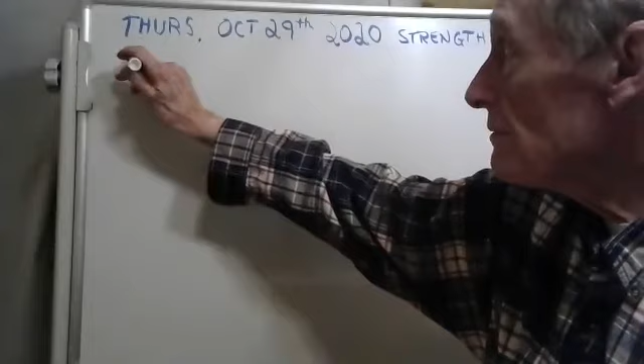The topic - we're going to study plastic behavior now. Can you go over problem F6-11? You want to look at that? Yeah, we can look at that. Mohammed wants me to look at problem F6-11. Let me find it, hang on. You don't know what page it's on. Never mind, I found it, it's page 302.

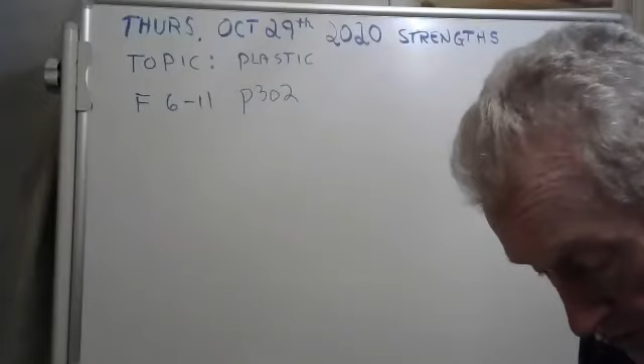First thing we have to do is get the moment of inertia. See, we're going to use this equation here. But we need this I thing here, they call that the area moment of inertia. We need that. Now let's see if we can get that. Let me draw this, it's 200 by 20. Okay, here we go. 200 by 20. Everything's 20.

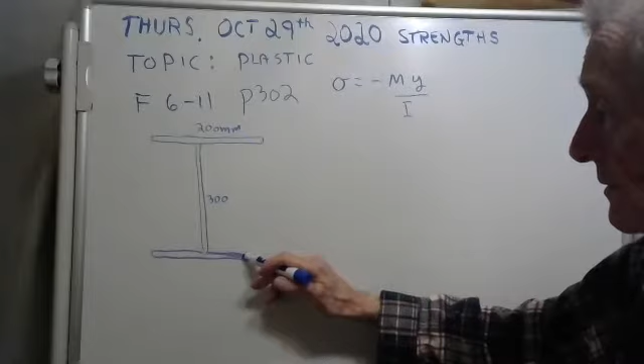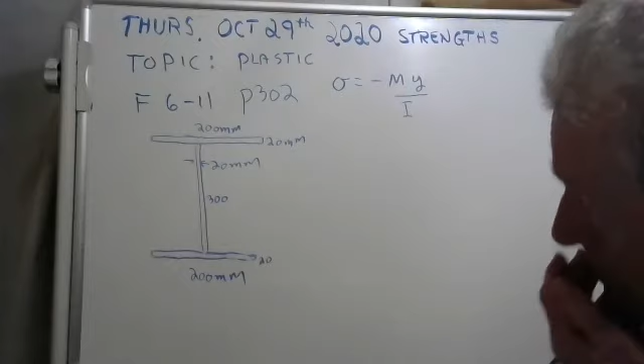But now, wait a minute, that's longer, that's 300. That goes down to here. Yeah, that's 300. This is 200. And then this one is the 200 again. Now that's 200. And these little pieces here are 20. These are 20. And this here is 20. And now be careful now, though - this 300 goes all the way to the very bottom and all the way to the very top. You know that, according to the picture there.

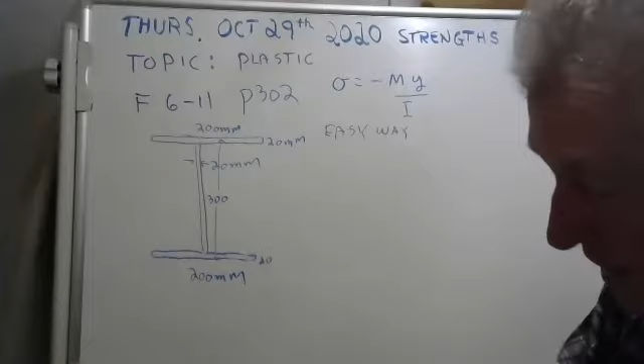Okay, now there's a hard way and an easy way to do this. Let's do it both ways. Now the easy way is you take this whole thing here. Yeah, there we go. See that whole thing? The moment of inertia, that whole thing is 1/12 times 0.2 times, in this case, it would be 0.34

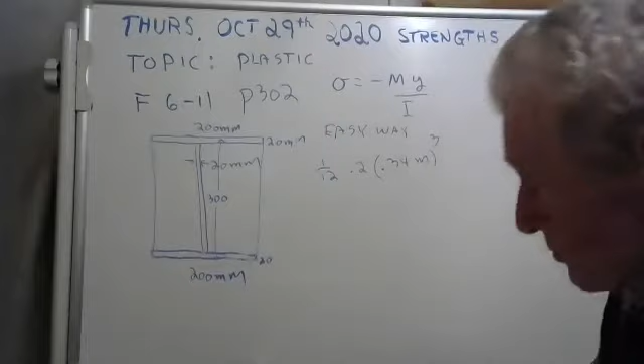cubed, isn't it? Look at the flap of your book - doesn't it say 1/3 or 1/12 BH cubed? 1/12 base - well, that would be the base, and see the height, it would be 0.34. Because it's, no, I got that wrong, it's just 0.3. Just about goofed up there.

You see this whole height is 0.3. Okay, and then what you do is you subtract these parts that aren't there. You see this rectangle here? We're going to subtract that. And then we'll subtract this one that's not there. Okay, let's do that. Minus 1/12.

Well, there's really two of them, but the total length on them is 180. And the height of those, now watch it, that's going to be 0.26, isn't it? See, if you take 300 and you subtract the 20 and the other 20, that makes 40. 40 from 300 is 260, isn't it?

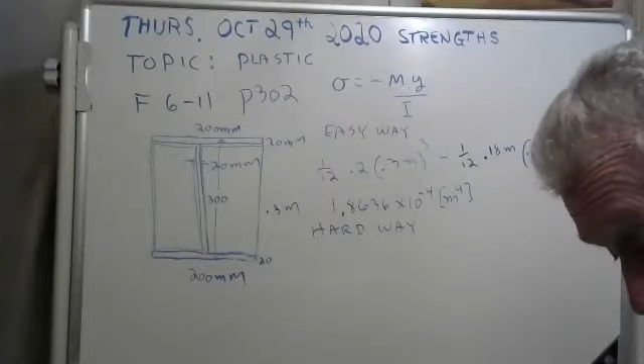Now let's do it the hard way. To do it the hard way, we're going to use the parallel axis theorem. And we're going to break this into three pieces. We have a horizontal, they call it a flange. And we have another horizontal flange. And then we have the web. So we'll just add the three up.

Now for this horizontal flange, they spell that F-L-A-N-G-E. What you got is 1/12 the base, which is 0.2, times the height, which is 0.02 cubed. But see, that would be the moment of inertia about the center of that flange. And to use the parallel axis theorem, we need this distance here.

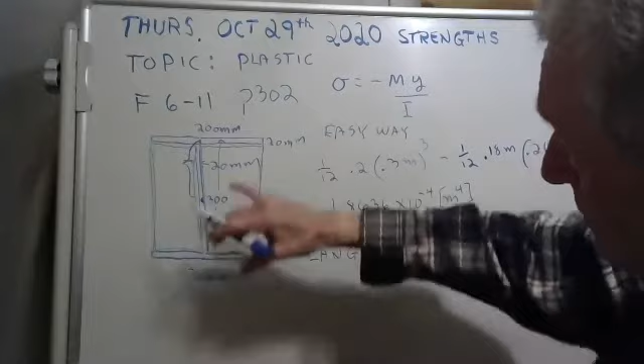So what you do is you take the area of the flange, which is 0.2 times 0.02, times that distance. Now let me think. That distance will be... well, it's 300 there, and it'd be 150. Then you need to subtract 10 from it. What's 150 minus? It's 140, isn't it?

And that's squared. Remember the parallel axis theorem goes like this. They call that the parallel axis theorem. And see, we got this here, right here. That's the moment of inertia about the center of that flange. And then you take the area of the flange, which is 0.2 times 0.02, right, times the distance between this G here. We call this G. You can call that point A if you wanted to.

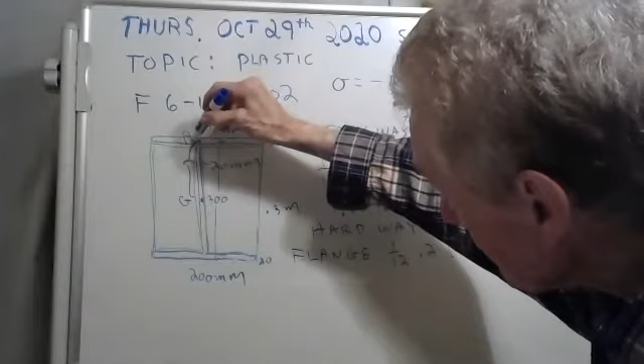That distance, I think, is 0.14 meters, isn't it? Did I do that right? Yeah, I think so. But the thing is, there's two flanges. So what you need to do is multiply that by 2, because there's 2 of them. There's one up here and there's a bottom flange.

But you're not done yet. You have to add the web. Now they call that the web. And the web is going to be 1/12, 0.02. Now watch it now. It's going to be that's the 0.26 meters cubed, isn't it? Let me think now.

1/12 the base. The base of the web is 0.02. And the height of the web is... that's supposed to say 0.26. It's 0.26 from here to here. Yeah, okay.

Okay, now here we go guys. We're going to take this here and we're going to add all that up. Then we're going to multiply it by 2. And then we're going to add this web to it. Let's see what we get. Here we go.

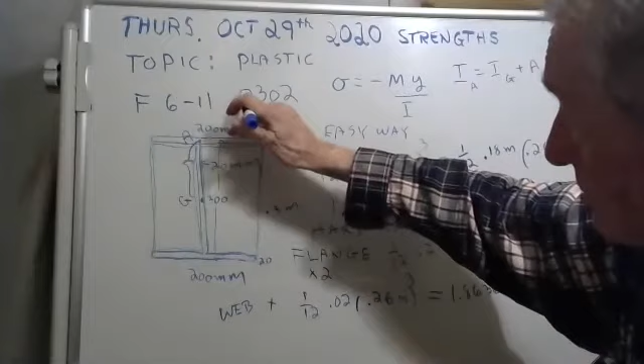Mohammed, which do you like better, the easy way or the hard way? Which do you like better? The easy way, I like it. Me too, I like it better. It's kind of nice. But you need to know, here's the thing: this hard way always works. The easy way, you got to be careful with it. It only works if you have a symmetrical thing like we got there. It's kind of got symmetry, doesn't it?

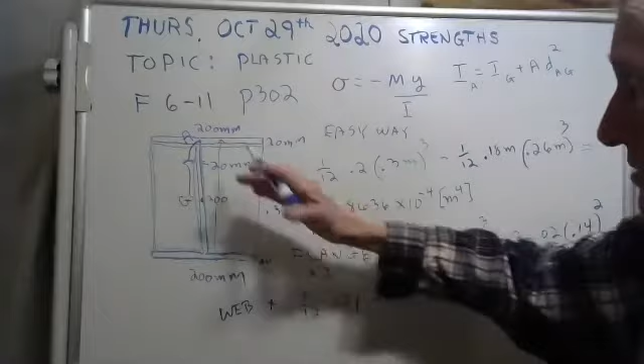It's got symmetry about the x-axis and about the y-axis. Be careful about doing it the easy way if you got an oddball looking thing, but it sure works nice if it's symmetrical.

Okay, Mohammed, are you happy with that? Yes sir, thank you. Oh wait a minute, we're not done yet. They wanted us to do something else, didn't they? Let me see here, just a minute. Oh, they wanted the maximum bending stress. So let's finish the problem for them.

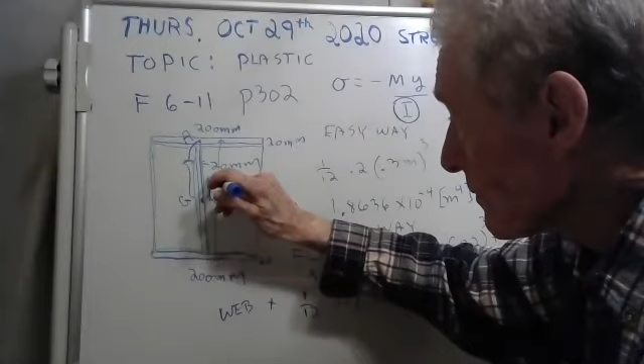All we've done so far is we've gotten this right here. They want this here, the maximum bending stress. Well, that's going to occur where this y is maximum. Remember what y is? It's the distance from the centroid, that's your y right there. And the maximum y is going to be either at the top or at the bottom. Now if you're at the top you get compression, and at the bottom you get tension. So they come out equal in this case, and that's what they want.

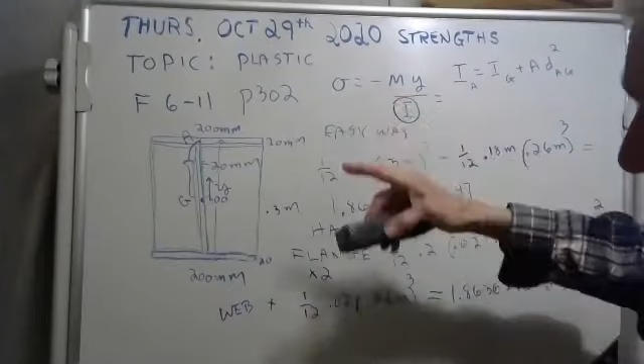Well let's do it, here goes. Never mind the minus, the minus is just to help you decide. See, if the y is plus, that's plus, that's plus. That minus there makes it a negative, that means you got compression at the top. So at the very top, if you want the maximum bending stress, you put a little b there if that makes you happy. Maximum bending stress will be, never mind the minus, I'm just getting the amount.

It's going to be, they gave you the M, 50 kilonewton meters. Now the Y, they're going from the center of the whole thing, the centroid of the whole thing, to the very, very top, is 150. So it's 0.15.

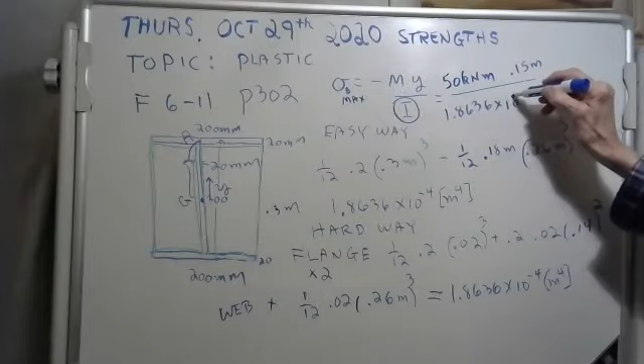And we have the moment of inertia. We did it two different ways: we did it the easy way, and we did it the hard way. We got the same answer both times, so we know we're right. Okay, I'm going to shut up for one minute, and I want you to plug that in, and we're going to get the maximum bending stress. On your mark, get set, go.

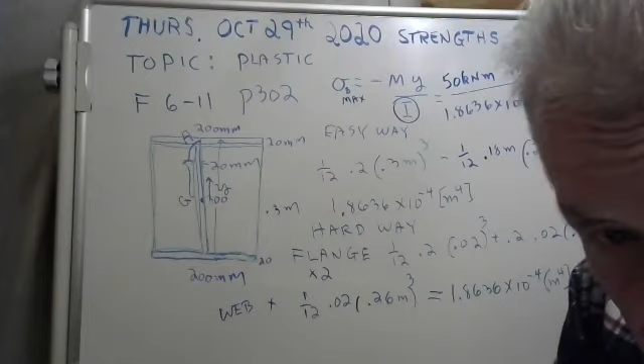Well, I got an answer. Let me go to one of my excellent students here. Shane, unmute and say hello, please. Earth's calling Shane, come in Shane. Earth calling Shane, come in Shane. Uh-oh, coffee break. Samuel, unmute and say hello please.

Good morning. Hey, good morning. Samuel, have you plugged in these numbers and gotten this maximum bending stress yet? Yeah, I got 40.2 megapascals. You know what, I think you're right. Proud of you, not much room there. Let's write it here: 40.24 megapascal. Good going, Samuel.

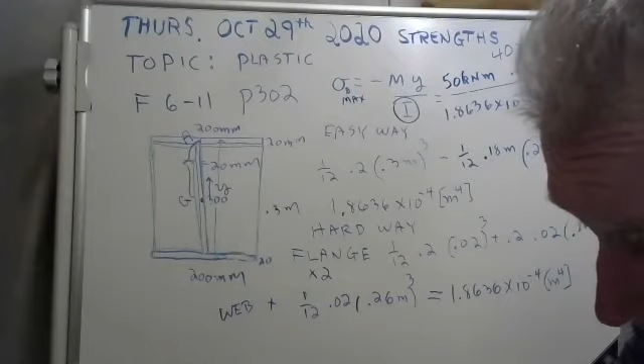Now I want to hear if anybody else got that. Anybody else get that? Yes sir. Yay, good. Okay, well let's look at the answer book and see what they said. This was F6-11. I'm going to go back here and see if that's what they said. They said 40.2 megapascal. The book says 40.2 megapascal. Yay, we did great, and we understand it. That's good.

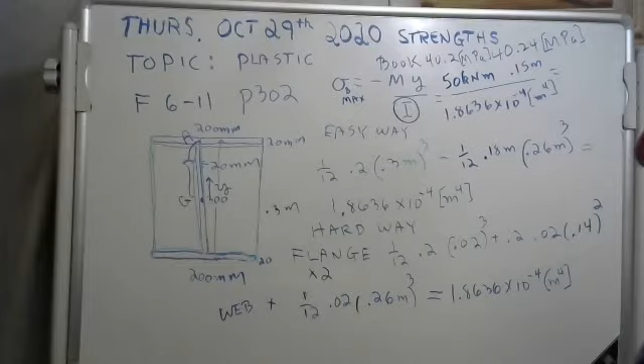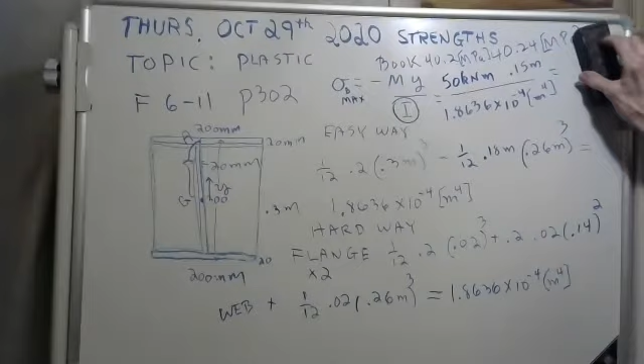Well, let's talk about plastic behavior now, and let's pick a little simpler cross section to work with. This is all in your book, let me show you where it is here. This is on page 344. I'm going to erase all this if it's okay, unless you have another question or comment. All right, nobody said anything, so it's all going to go bye-bye. There you go. Okay.

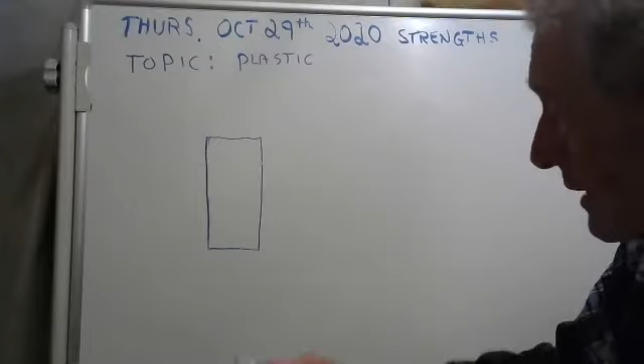Now let's take a simpler cross section. Let's just take, maybe, we could take a 2x4. How would that be? Does that look about like a 2x4? I don't know, yeah. There we go, 2x4. Now if you put a bending moment on that, the way the book draws these bending moments is they kind of go near like that. There's your bending moment. See, here's this 2x4.

It might be easier for us to work in metric. Let's do that. Let's say this is 4 centimeters, and this is 2. Won't that be easier? And we won't have to fool with the English, which can be kind of confusing.

Now the way I write these bending moments is I draw them like this, I put a double arrowhead on them like that. But that means the same thing, it's a bending moment. See, it's a twist this way. And a twist, if you twist something that way, it puts compression on the top and tension on the bottom. Here, I'll draw it for you. It puts a force.

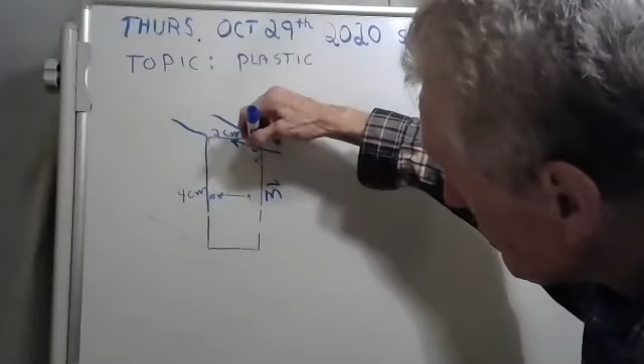Well, it's a force. It's kind of a three-dimensional force on the top, but it puts a tension force on the bottom. I don't know if that makes a whole lot of sense. But see, it's maximum up here because stress is equal to minus My over I, and the y is maximum up here at the top. Y is this variable going up this way. And so you get the maximum stress when you have the maximum y at the top.

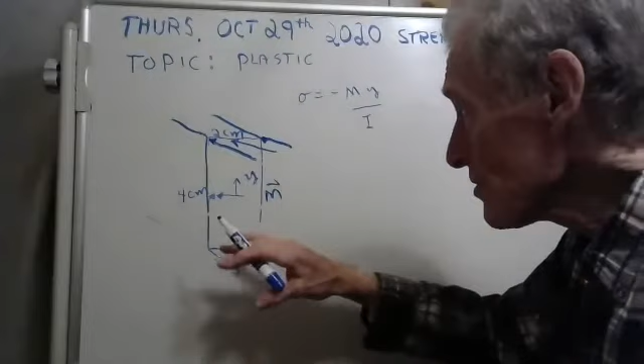And there's a distribution going on if you have a moment like that, and the distribution kind of goes like this. See, there'll be a place down here where it's zero. It's kind of hard for me to draw this, it's really three-dimensional, but I'm trying. But you have one down here also, but it's going this other way, it's going like this.

I think I did that wrong. Yeah, I think it's like that. And see, it's a three-dimensional thing.

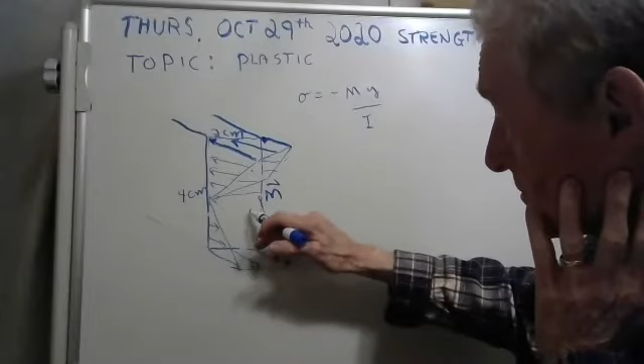Really hard for me to describe that. They have some nice pictures in your book of it. If you look on page... yeah, there's a really pretty picture of it on page 340. This is a normal bending stress distribution, and they have a picture of it on page 340. You've got tension—oh, now wait a minute.

That one has tension on the top and compression on the bottom. I don't like that much because we're used to having compression on the top. Let's see if I can find another one that we like better. Wouldn't you know, they don't have compression on the top like they need to. Let me keep looking here just a minute, I'm not quite ready to give up on that. Why they would put tension on the top, I do not know.

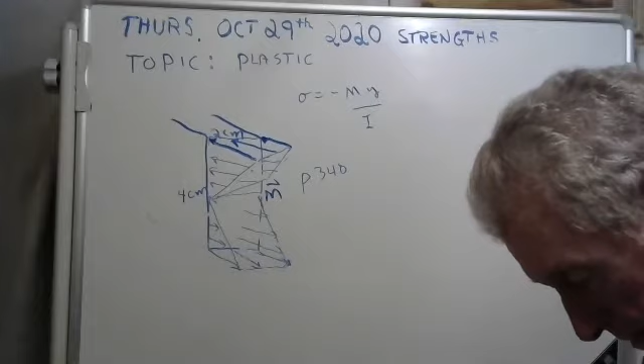Sorry to waste your valuable time, but I wanted to show you this. We might have to live with my drawing, do the best we can with it. I think we're stuck with it.

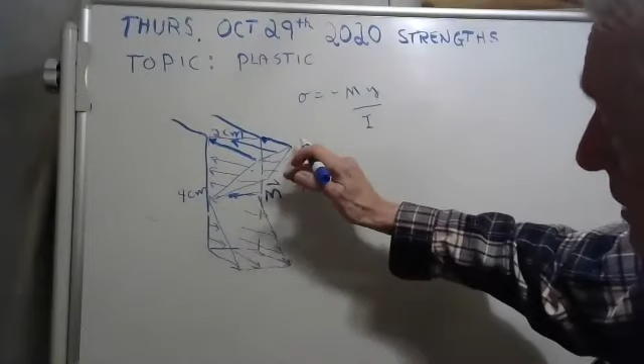Now here's what's going to happen. If you make that bending moment bigger—remember we had a bending moment here, I like to draw them with the double arrows—if you make that bending moment bigger, you'll finally reach a place where you have the yield strength stress at the very top, and you'll have the yield strength stress on the very bottom. And if you make the bending moment even bigger—by the way, they have a name for that. They call it the maximum elastic moment.

We can figure what it is. Let me go ahead and figure it for you. If you wanted the maximum bending moment, there'll be compression on the top and tension on the bottom—don't get upset by that—and this is going to equal the maximum bending moment. Now that's the symbol for it: M with a little y there, a little capital Y. That's called the maximum elastic moment.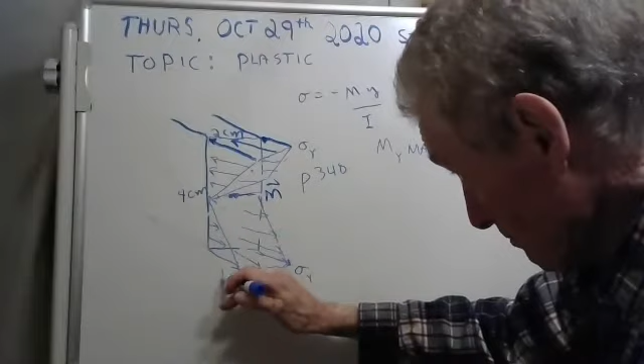Now the y, in this case, if this thing has a base B and a height h, then that y for the maximum bending moment would be h over 2, wouldn't it? And the I would be 1/12 the base times the height cubed, if you had a rectangular shape, like a 2x4 like we have here.

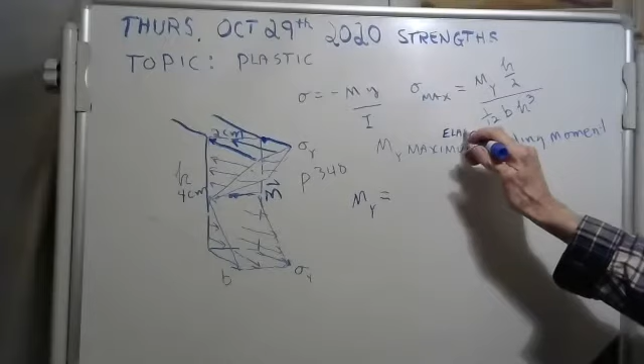Okay, well then let's solve this. Here we go, we're going to solve this. We're going to do some algebra, and we're going to write the maximum possible bending moment—that's just before you start to go plastic. Do you understand? If you make that bending moment any bigger, it starts to go plastic up here at the top. But right now we're finding the maximum. It's got another name: it's called the maximum elastic bending moment. It's still elastic everywhere, it hasn't gone plastic yet.

And it's equal to, well, let's see, it would be 1/12 base height cubed. You'd have to divide by the h over 2, right? And then multiply by your yield strength, because that's what you'd have if you had a maximum elastic bending moment.

Now let's do a little algebra and see what we get here. You would get 1/6 BH squared. I did a little algebra there. See, the 2 goes up in the numerator, 2/12 is a 6, you've got a base, and one of these h's cancels out. And now, wait a minute now, what happened to my— there. There's your equation for the maximum elastic bending moment.

Now, I want you to look in your book, they've got that equation in here someplace. Let's see if I can find it. I lost my page now. What page is that on? Can you find it for me?

Now let's do it for a piece of steel. Suppose this is A36 steel. Go to the back and let's look up, in the metric units, the yield strength for A36 steel. Well, according to the back of the book, I'm looking in these tables back here. It says 200 gigapascal.

Do I have time to write that someplace? Yeah, here we go. It says for A36 steel, 200 gigapascal. Okay. Now help me come down here.

Do we have room? I think we have room. We have 1/6 the base. Now what we got there is 2 centimeters, so that's 0.02 meters. And the height is 4 centimeters, so that's 0.04 meters, which you have to square it, times the 200 gigapascals.

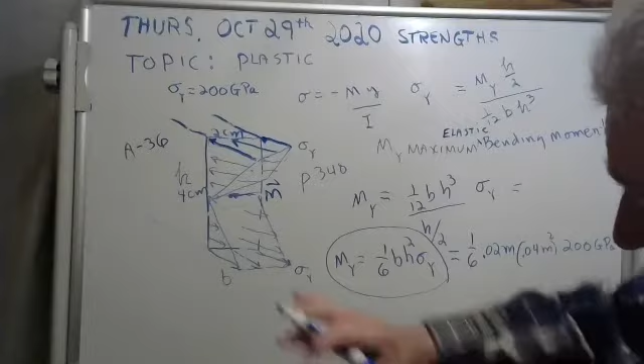Okay, I want you to take your calculator. We're going to find the maximum possible elastic bending moment if you had a 2 by 4 centimeter beam out of A36 steel. Put that in your calculators. Tell me what you get.

Professor Griffin, yeah. Isn't that 200 gigapascals supposed to be 250 megapascals, because 200 gigapascals is the modulus of elasticity and not its yield stress?

Honkin, thank you. Who is that that's helping me? Who is that? This is Samuel. Samuel, thank you, Samuel. This is wrong. Samuel is absolutely right. This is 250 megapascals. Samuel is on the ball. Now, plug that in and we'll get it right thanks to Samuel.

Well, I've got my answer. Now, did you guys get 1,333 Newton meters? And if you did, say uh-huh. That's what I got. Yay. Give me another uh-huh. Yeah, uh-huh, about the same.

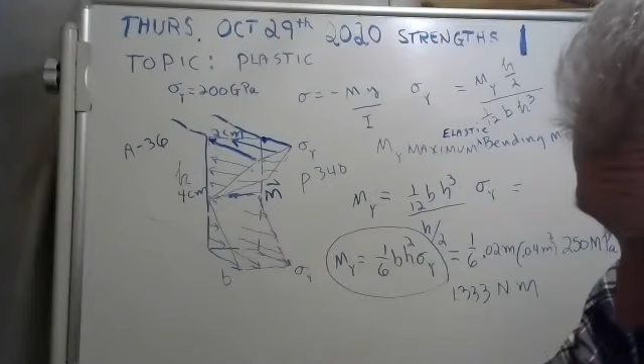Okay, we have just found the maximum possible bending moment that this thing could take and still be elastic. Now, if you make it any bigger than that, it goes plastic. Let's go plastic. Let's go, in fact, let's go fully plastic and we'll calculate that. Here, I need a little room here. I'm going to redraw this thing. It's actually simpler when it goes fully plastic.

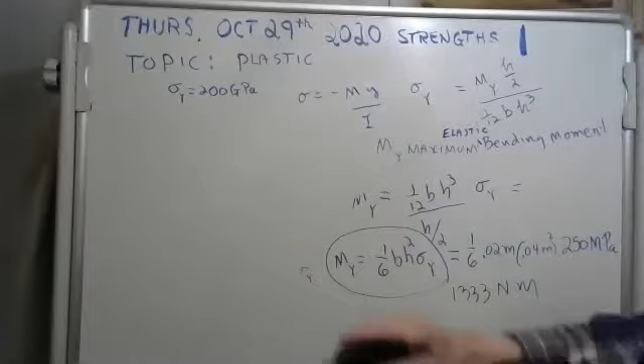Now this here is wrong. It's 250, isn't it, Samuel? Let me put the right number in there. That must have been from that problem I was doing with Mohammed a little while ago, huh? I don't know what it was, but it's 250 megapascal, and Samuel helped us out there.

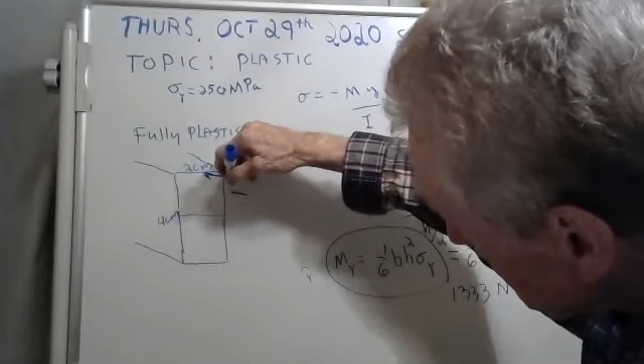Okay, now if you go fully plastic, then here's your 2x4. There it is. It's 2 centimeters this way, 4 centimeters this way. And what happens when you go fully plastic, it starts up here. You get plastic up here of tension, and it builds, and pretty soon this entire upper half is, well, here, I'll try to draw it. It's all, you've got the yield strength on the entire upper half.

But now on the bottom half, you have compression. You have the yield strength, I'm sorry, but you have tension on the bottom, compression on the top, and we can get the bending moment. Here we go. And now this is going to be called the fully plastic bending moment. Now what we did before was the maximum elastic bending moment, but this is going to be the fully plastic bending moment.

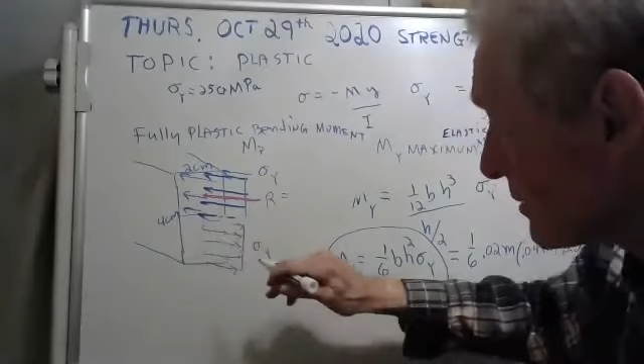And we're going to get it for this same beam here. Now let me get my red color here. And the resultant of this distribution, it's a force. It's really, these forces are three-dimensional because they're pushing on every part of the, you understand? They're pushing on every part of this beam cross-section. And so what you have to do is you have to take your yield strength, normal stress times

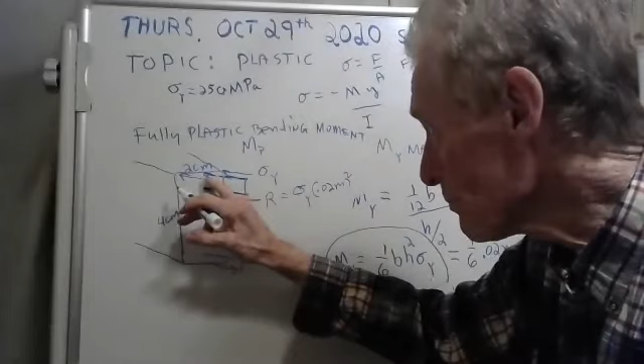that area there. Now that area is 0.02 meters squared. You know how it works. Stress is equal to force divided by area. So force is equal to stress times area. Okay, well this area is 0.02 meters times 0.02 meters. That's the force acting on the upper half of our beam. But now you also have a force this way, a resultant force.

And that resultant force is equal to your yield strength times the 0.02 meters squared, also the same thing.

Now we have something called a couple. You all know what couples are. They're two equal and opposite forces separated by a distance, and this distance between them happens to be 0.02 meters.

So the moment caused by that couple is going to be the fully plastic bending moment. It will be your force, which is sigma y times 0.02 meters squared, times the distance between them, which is 0.02 meters. That's how you figure couples: you take the force times the distance and you get the couple.

This will give us our fully plastic bending moment. Let's see what that is. I could almost do that in my head, but not quite.

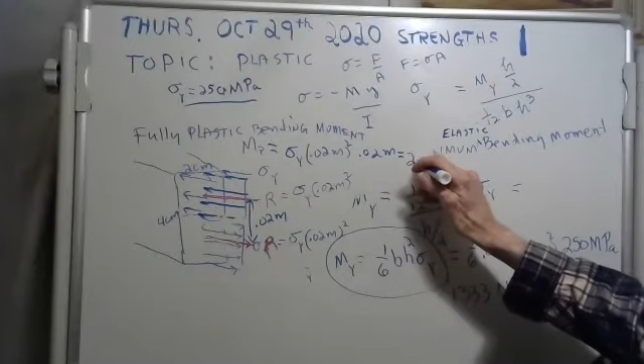Here it goes: 250 e to the 6 times 0.02, cubed. Did you get 2,000? Did you get 2,000 Newton meters? That's what I got. I got 2,000 Newton meters.

That's bigger than 1,333 Newton meters. But remember, that's what you have if you're still barely elastic. If you increase the bending moment to 2,000 Newton meters, it's completely plastic. Once that happens, it's soft like butter and it just collapses. You've got yourself a major problem.

Now there's an interesting relationship. If you have a rectangular beam, it turns out - there's some room down here, let's do this - that if you take the fully plastic moment and divide by the maximum elastic moment, you get 1.5. Try it.

Take 2,000. What is 2,000 divided by 1,333? Try it, let's see what you get. 2,000 divided by 1,333 - you get 1.5.

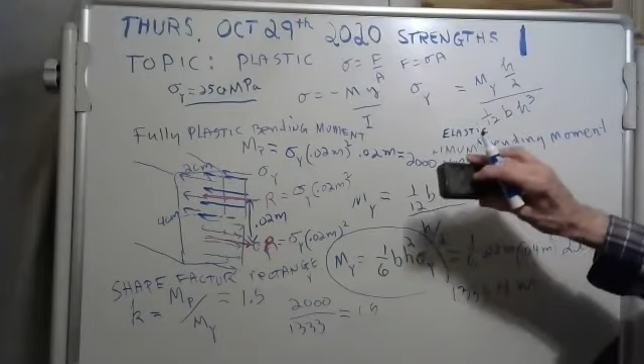The general equation for the fully plastic bending moment for a rectangle would be the force, which is the yield strength times that area, which is base times the height over 2 - that's the force. And then the couple, that distance there turns out to be h over 2, I believe. Didn't we say that? Yeah, I think that's it.

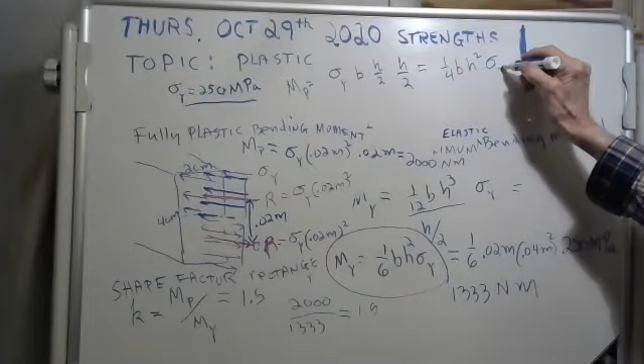Let's see what we get. Oh yeah, that's it. Now this is the fully plastic bending moment, just in algebra. And here's what you'll get: you'll get 1/4 BH squared sigma y. Now look in your book and see if you can find an equation like that.

Look on page, let's shop around here - look on page 346. On page 346, kind of up in the upper third of the page, I see 1/4 BH squared sigma y. Yeah, that's called the fully plastic bending moment.

Okay, good. We've done good. Now let me sum this up and maybe we could work some problems. That'd be good.

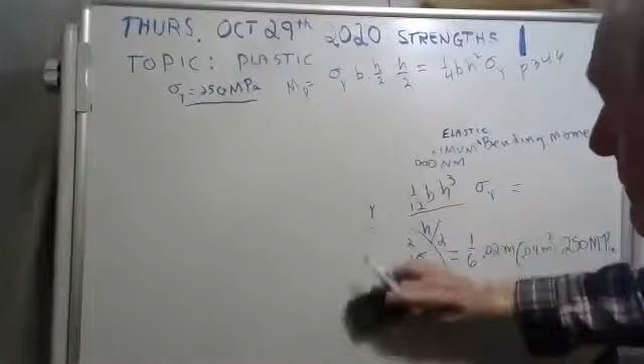We have something called the maximum elastic bending moment, and it's equal to - I think we said - 1/6 BH squared sigma y. I did that from memory. Did I do that right? Yeah, that's right.

And then we have what we call the fully plastic bending moment, and that turns out to be 1/4 BH squared sigma y, and that's on page 346. Yeah, there it is.

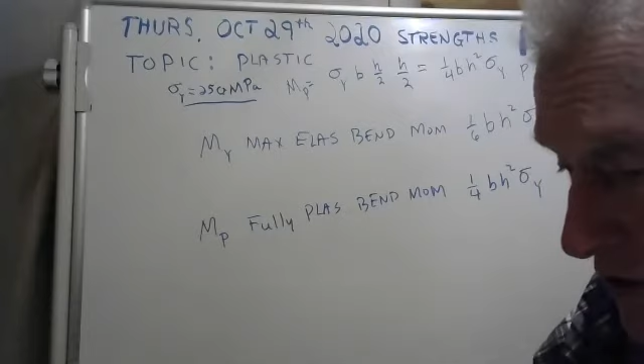But there's a whole range of things in between. The ones in between are called elastic plastic bending moments - they're partially elastic and partially plastic. You'll see a lovely picture of those on page 345. It goes plastic up at the top, but it's not totally plastic - you still have an elastic region kind of in the middle. Here, I'll draw it for you. Do I have room? Yeah, kind of.

What happens is you have a region here that's plastic, and you have a region here that's plastic, but it hasn't gone completely plastic. You still have an elastic region in the center of your beam cross section.

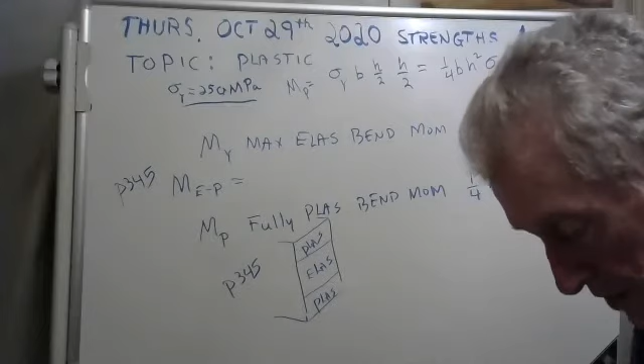You'll see that on page 345 in your book. Take a look, there's an equation for it. Now if we had more time together I would love to derive this equation, but we don't have more time together. But they do it in your book, you could read the book, it wouldn't hurt you. It's on page 345. And this equation goes like this.

Starts off kind of reminiscent of what we were doing here, 1/4 BH squared sigma y. But then it's got this other term. Hope you can read my writing. That's the equation for the elastic plastic moment.

You know what B is? It's the base of your 2x4 or whatever it is, and the height, you know that's the height. And we know what that sigma y is, that's your yield strength normal stress. That's where it yields. But what is this y sub y?

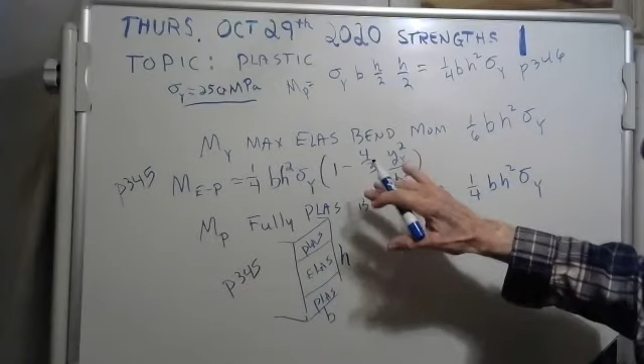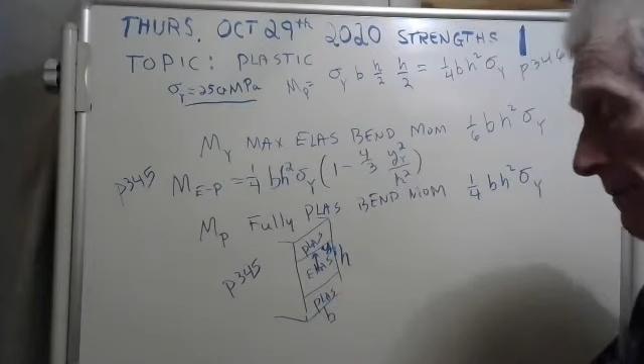What that is, it's the distance from the centroid to the beginning of your plastic region. There's your y sub capital Y, that's it. That is, I hate to call it radius because radius depicts you're talking about a circle, right? We don't have a circle here. It's the distance to your plastic, where your plastic region begins.

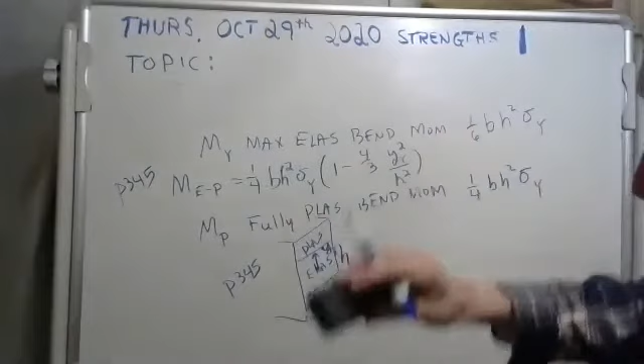Okay, well great, let's go back to our example that we just did. We're going to use this equation on that example. Do you remember, we're talking about plastic bending moments now. Do you remember that the maximum elastic bending moment was 1333 Newton meters? And the fully plastic bending moment was 2000 Newton meters.

Well let's do one in between. Let's pick a number between 1333 and 2000. How about, I don't know, how about 1500? Suppose you had, now you know what this would be? This would be an elastic plastic bending moment, wouldn't it? 1500 Newton meters, that's in between 1333 and 2000, isn't it?

Okay, well let's plug that in and we'll find the distance to the plastic region. Here we go, we have the equation. It's 1/4, now the base on our 2x4 is 0.02 meters, and the height, remember, was 0.04 meters. And you have 1 minus 4/3. The distance, this y sub y, is the distance from the centroid to where the plastic region starts. And then the h is 0.04.

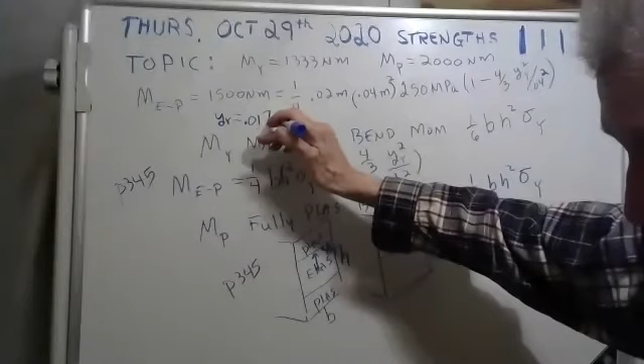Okay, I got an answer that makes sense this time. This time I'm getting 0.01732 meters. How about you guys?

See where that puts me? I got it too. Look where it puts me, right about here. 0.01732 meters.

Yeah, so here's the deal. You get this plastic region here, and then a pretty big elastic region. All of this in the middle is elastic, and you have a plastic region at the top and the bottom. It's an elastic-plastic moment. The 1,500 Newton-meters is in between totally elastic and totally plastic. It's partially elastic, partially plastic.

Well, great, we're making progress here. Well, let's do something other than a rectangle.

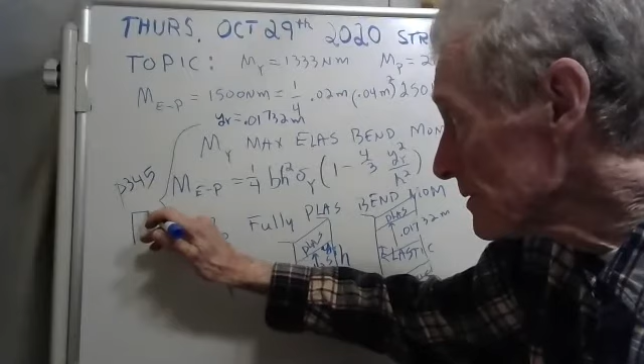Now, you guys got to know something, these equations, these three lovely equations that we derived - we derived those equations - those are only good for rectangles. If you don't have a rectangle, those equations are no good.

Well, let's do something without a rectangle. Here we go, we're going to try something else. I need some room to do this. But before I do something else - I think I'll do a circular rod. But before that, any comments or questions on the elastic-plastic moments of rectangles?

Well, okay, we're going to do a circular cross section now. Let me erase all this stuff. Those are wonderful equations we have there, but they're only good for rectangles. What if you have something else?

Like, for instance, one of these. In fact, we did one of those - Mohammed had me do one of those earlier. Now that is made of rectangles - there are rectangles in there, but that is not a rectangle. In fact, they have a name for that - they call it a wide flange beam. We have tables with a lot of information about wide flange beams in the back of your book.

And maybe we can work on that, but right now we're doing circular cross section. And we'll start with the maximum elastic bending moment. And the name of this is the maximum elastic bending moment.

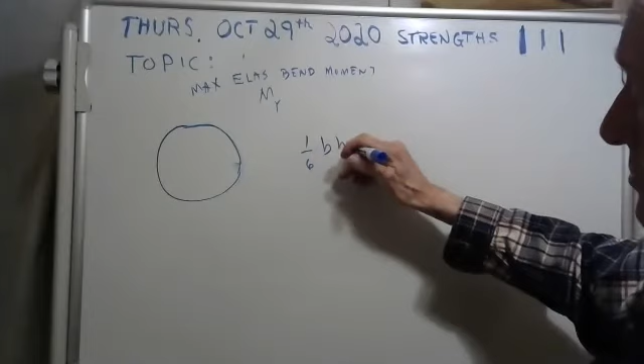But see, it's not 1/6 BH squared sigma y anymore. That's only good for a rectangle. I don't think we're going to have the same formula now - that's just for rectangles. What are we going to do when we have a circular cross section, like a rod?

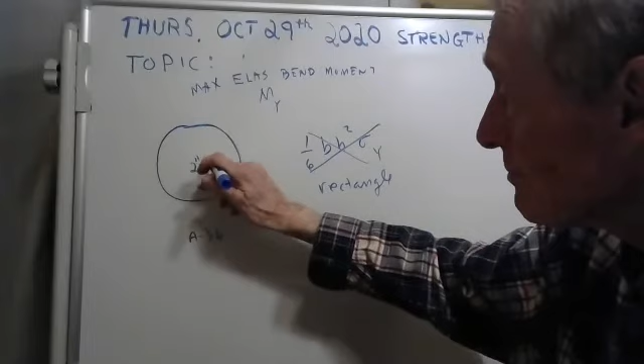We could have an A36 rod. In fact, why don't we do one with the Ingles, senor? So suppose this is a 2-inch diameter A36 rod. That'll support a lot of weight. Heck yes, you could build a tiger cage out of that. You could build a buffalo cage out of that. I don't know if you've ever seen the fences they build to keep the buffalo, or the bisons, I guess is what they really are - but they better be pretty strong, because those babies can run right through a barbed wire fence.

Okay, well, how are we going to get this? Well, here's what we could use - we could use this equation here. Now that equation has a name. Let me ask one of my excellent students here if they can remember it.

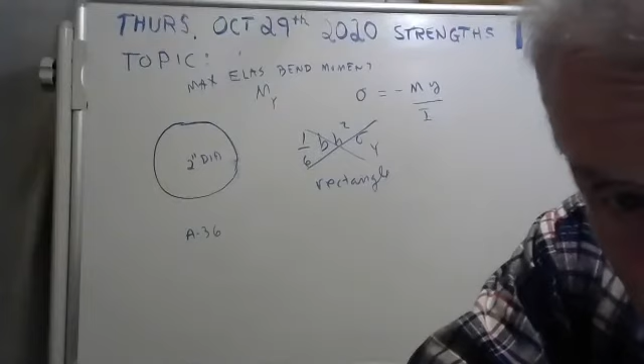Nicholas, unmute and say hello, please. Hello, hello. Hey Nicholas, this equation has a name. It's probably the most important equation in this chapter 6. What's the name of it? He's thinking. Look at it. I don't know. I'll give you a hint - it starts with F. Starts with F. Starts with FL. It's got an X in it. Come on Nicholas, you know this. I don't know it.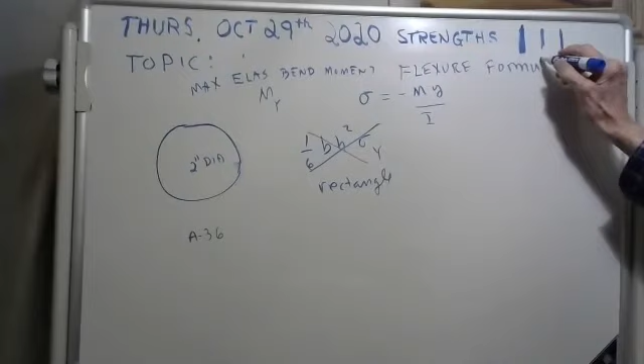Nicholas, it's the flexure formula. They all look the same. They call that the flexure formula.

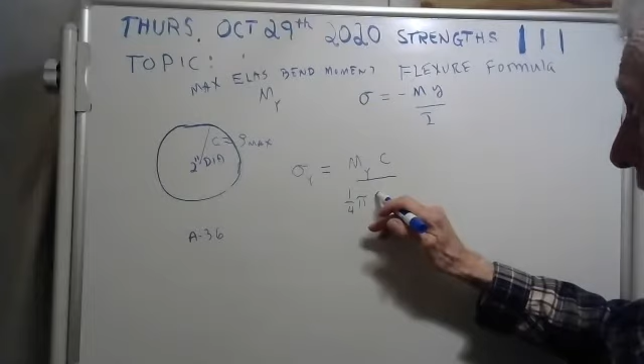Okay, now if you wanted this here, here's what you'll do: you put in your yield strength stress. And this here would be - have you ever noticed they use the symbol C? You know what C is? It's the maximum distance from the center. So you put in a C and then divide by the I. Well, what's the I for a circle? Well, just look it up, go in the back and look it up. It is 1/4 pi r to the 4th, which in this case would be c to the 4th.

Okay, guys, I found that 1/4. I found it in the flap of my book here for a circle.

All right, so didn't we already do that? Well, wait a minute, you can't go 250 megapascals if it's in English, senor. You know what it is in English? I think it's 36 KSI. If you don't believe me, go to the back and look. 36 KSI, yep, that's it.

For structural steel. We're going to get this thing right here. Now, this thing here is called the maximum elastic bending moment.

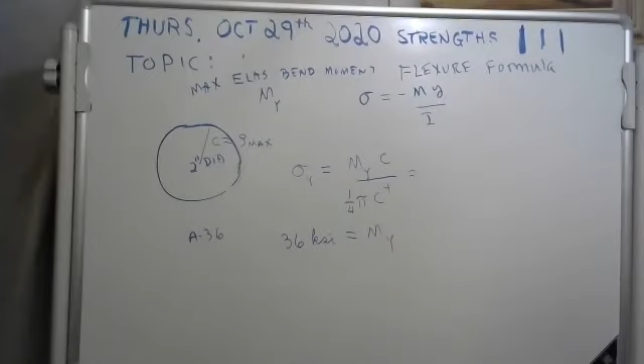And so I can do that. I know that's, well, that'd just be 1 inch, wouldn't it? Yeah, it's just 1 inch. This is 1/4 pi times 1 inch to the 4th power.

Now be careful about the units. When we get through here, this is going to be in inch pounds. Now I want you to go ahead and solve this and tell me what the maximum elastic bending moment is for a 2-inch diameter structural steel rod. I'll shut up, go ahead.

Okay, I got what I think the maximum elastic bending moment is. Let me ask one of my excellent students here.

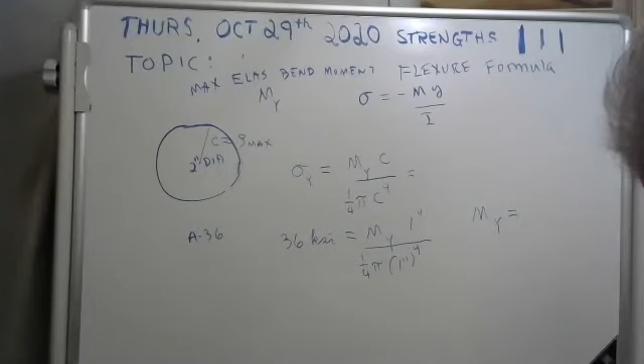Chase, unmute and say hello, please, Chase. Earth calling Chase, come in, Chase. Hello. Hey, oh, there he is. Hey, Chase, have you plugged in this equation and gotten the maximum elastic bending moment yet? I am still working on it.

Yeah, take your time, I'll check mine, make sure I got mine right here. Yeah, I think I got mine right. I'll give you a few seconds here, Chase. Any luck so far, Chase? I'm about to have the answer real quick. All right.

I wonder if I did mine right. I got 28.27. That's correct, it's 28 point... Wait a minute, I got 28.27. Yeah, that's what I got. Now, what are the units, Chase?

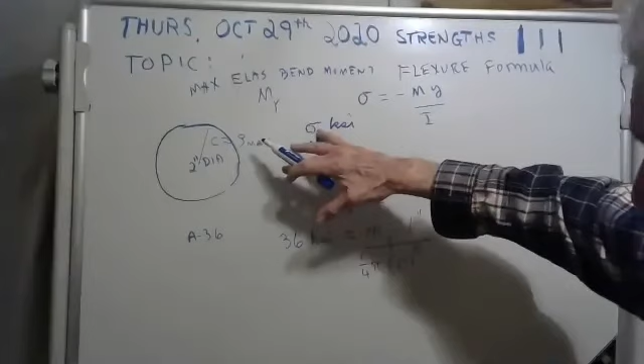This is good, this is good not only for you, Chase, but for the rest of them. They need to know that stress is in KSI, but bending moments not in KSI. Those would definitely be in Newton meters. Yeah, now wait a minute. Again, now you're learning stuff here. If you're in English, you don't have Newton meters. Now, see, if you're in metric, yes, in metric you have Newton meters. But, senor, we are in inglés, por favor.

They'd definitely be in pound feet then. Yeah, it'd be what now? Pound feet. Yeah, there you go.

Now, actually, when you do this, this turns out to be kip inches. Let me show you what you get. You get 28,274 inch pounds is what you get. Or you could write that as 28.274 kip inches. They're the same.

Now, if you wanted foot pounds, we could get foot pounds. Just go a foot is 12 inches. Or you could come up here and you could go a foot is 12 inches. And what you'd have is 2356 foot pounds. And here what you would have is 2.356 kip feet.

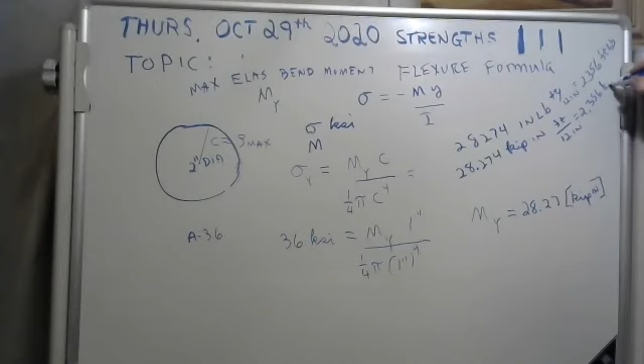That's valuable stuff. I'm talking to Chase, aren't I? Is it Chase I'm talking to? Yes, sir. Yeah, Chase, this is valuable stuff. You're going to be dealing with stuff like that. I don't care whether you're a civil engineer, mechanical engineer, I don't care what you are. You got to know foot pounds, kip inches. You got to know about those.

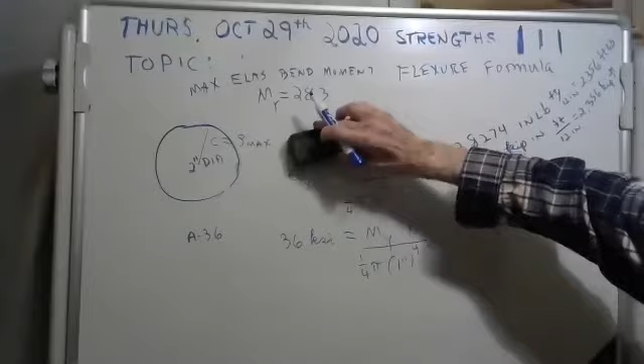Okay, well, how are we doing? We have 4 minutes, I was going to do the fully plastic moment. We better hurry. What we just came up with is the maximum elastic moment. We got it, yay, it's 28.3. We'll round it off to that because we're lazy. And we'll write kip inches on it.

You guys are learning some important stuff. Now let me show you the fully plastic moment, but our time together is coming to an end. You've got homework, it's on Blackboard.

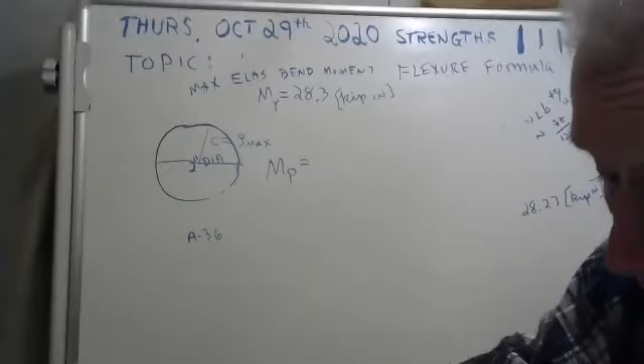Here's what we're going to do. I better hurry, I only have 3 minutes. You know that the whole top half of this thing is going to go plastic, and it's going to be compression. I'll color it green. There you go, it's compression.

The force involved is going to be your yield strength times the area of half a circle. The area of a half circle is 1/2 pi r squared. If it's got a 1-inch radius, then it's 1/2 pi times 1 inch squared. That will give you the force.

If it's compressive, that means you've got a compression force doing that, and it's equal to 1/2 pi, 1 inch, sigma y. But you also have a tensile force pulling on the bottom, equal to the same amount: 1/2 pi times 1 inch squared times your yield strength, which, if it's A36 steel, is 250 megapascals.

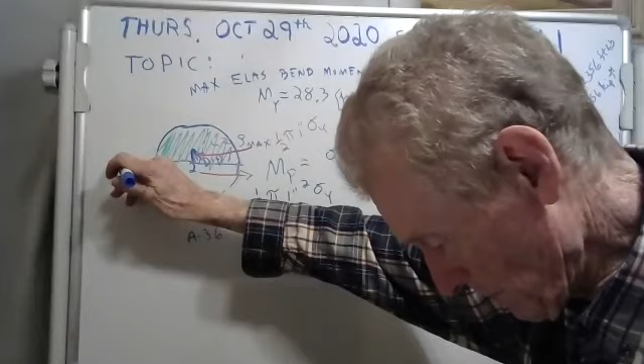So we can get those forces, and the distance between them is a little tricky. If you go to the flap of your book, it says the centroid of a half circle is at a distance—see that distance?—of 4r over 3 pi.

4r over 3 pi. So this couple here is going to equal this force we just cooked up, times the distance between the couple, which will be twice that. It'll be 8r, which is 1 inch, over 3 pi. That's the couple.

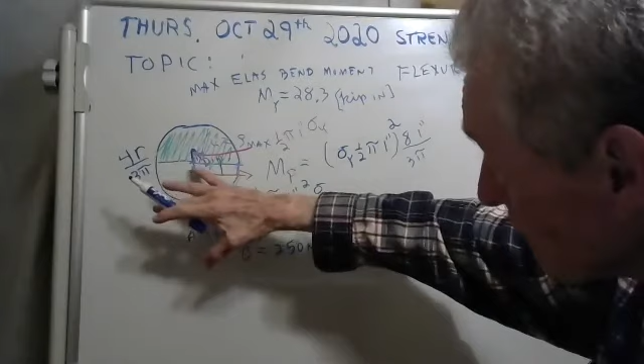Here's the force—what happened, I don't want an equal sign there, I want that there, that's the area. That times that is the force. And this is the distance between the couple. It's 4r over 3 pi for the top half circle, 4r over 3 pi for the bottom half circle, but the total distance is double that: 8r over 3 pi.

Okay, I'm out of time, but we'll steal a minute. We're going to get the fully plastic bending moment. Remember, this is 250. I'm plugging this in now: 250 e to the 6th divided by 2, parentheses goes here, that's just 1 squared, divided by 2, divided by 3, times 8.

If I did that right—well, that can't be right, I did something wrong. 250 e to the 6th, times, or divided by 2, times 8, divided by 3. Okay, that can't be right. Oh gee, and I'm running out of time.

Okay, just a minute now. 1/2 pi r squared, that's the area. That's the stress, 250 megapascals, right? No. 36 KSI. I'm doing the same thing one of my excellent students did—they got the metric and English mixed up. This is 36 KSI.

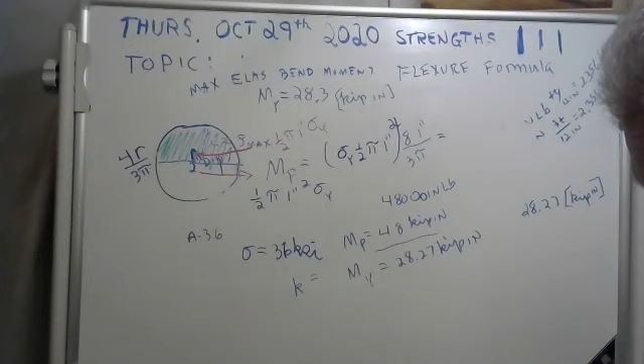Now look, this is your fully plastic bending moment, 48 kip-inches, and this is your maximum elastic bending moment. See, it's smaller. And if you want the shape factor, that's the ratio. Let's see what that is—it's not 1.5. It's 48 divided by 28.27. The shape factor, rounded off, is 1.70 for a round beam.